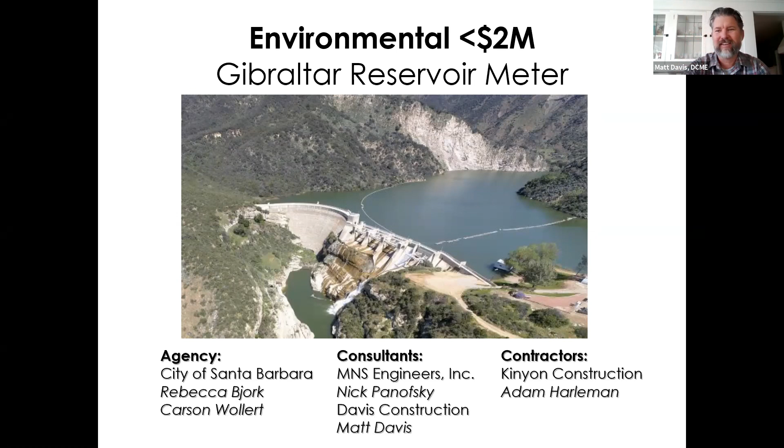And to present today, I believe Carson is going to present. Is he on? Or maybe Matt or Nick? I'm on. Nick's on the call. Okay, I had written down that Carson was gonna lead us through this, but yeah. Hi, Brianna. This is Matt, and I did speak with Carson earlier today, and he was planning on being on. So maybe he's just a little tardy, but I'm sure Nick and I could probably ad lib until he shows up. Okay.

So I guess if you wanted to, we have up here on the screen just some of the project highlights that we picked out. But if you want to share a little bit about the project, what the goal was, and maybe some of the challenges during construction. Sure, I can start off with just a couple of points on kind of the technical background of the project. So this project is how the City of Santa Barbara conveys water from Gibraltar Reservoir through their tunnel system to the city. And prior to this project being implemented, oh man, there's Carson. I don't want to steal his thunder. He just joined. Before I get into any details, I'll let him take over.

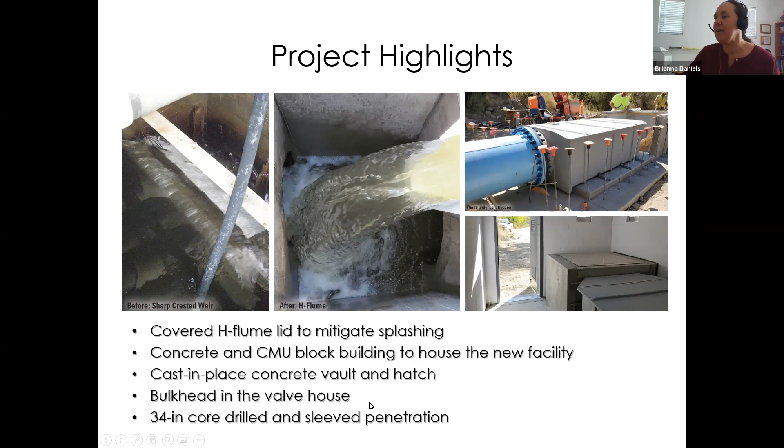Well, that's fantastic. That's really creative, and what a beautiful place to have a work site. Okay, so now we're going to test our skills, I think. Thank you very, very much. And the plaques should have been sent out. So, we have one more project before we get into our raffle.

Still in the environmental category, this is the Arroyo Grande Creek Channel Waterway Management Program. It's the County of San Luis Obispo with Nola Engelskirger and Cannon consultants, John Evans and Evan Lowe, and then Crye Construction did the construction. So we have quite a few slides in here. I believe John Evans is going to be presenting today, and you'll have to walk me through these slides.

So, okay, I'll tell you when to start. Can you hear me okay? Sure can. Okay, all right, let's go to the first one then.

Okay, so the county called the project the Arroyo Grande Creek Channel Waterway Management Program. And as you mentioned, the county was the primary agency responsible for the project. Okay, next slide. And as you also mentioned, both Cannon and also Waterways Consulting, who did all the initial hydrology analysis of Arroyo Grande Creek. And then they also came up with initial elevations of what the levees on both sides of AG Creek needed to be to be more storm worthy.

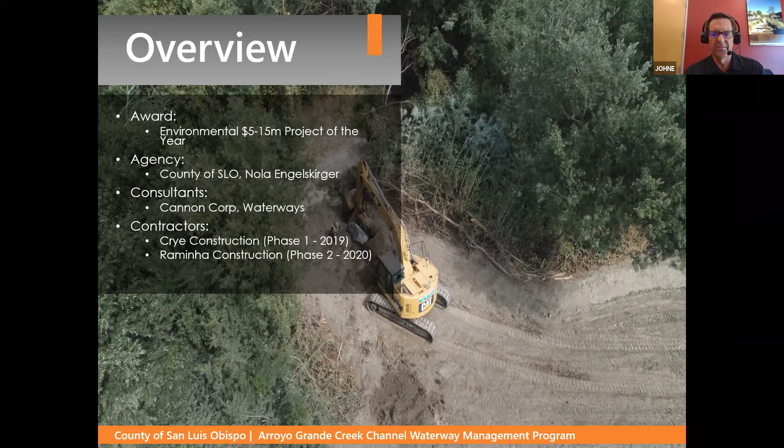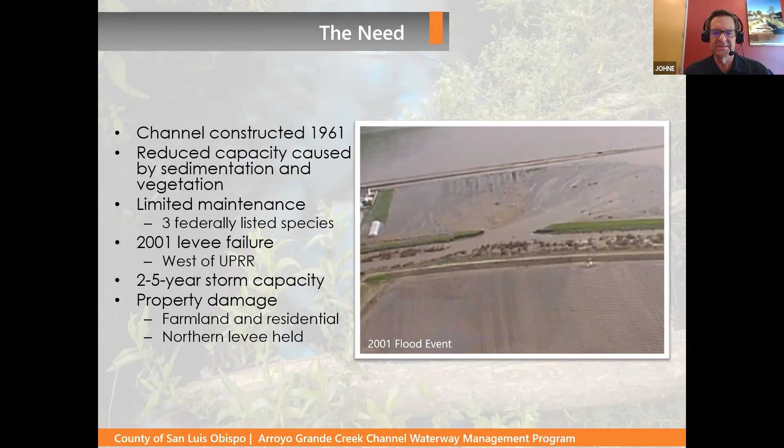So to solve the problem, several things needed to happen. First of all, there were funds that needed to be obtained, and through 3 grants and also from the funds raised through a flood control district that was established after the levee breach, $8.3 million was raised for the work. And the work basically consists of 3 things. One was to clear and clean up portions of the creek. The second was to fortify the levees. And the third is ongoing maintenance.

So when the permits were sought, the permits needed to include all three of those aspects, especially the ability to continue to get into the creek and maintain it after the work was done, so that the county didn't find themselves with the same problem that they had over the years, not being able to maintain it adequately.

There was quite a bit of community interaction and outreach that occurred with the project, especially with the farm field owners to the south. And then there was a lot of concern by the residents to the north, wanting to make sure that if water did ever breach the levee again, that it was going to head to the south rather than to the north. When the design was put together, it was a joint effort between Cannon and Waterways.

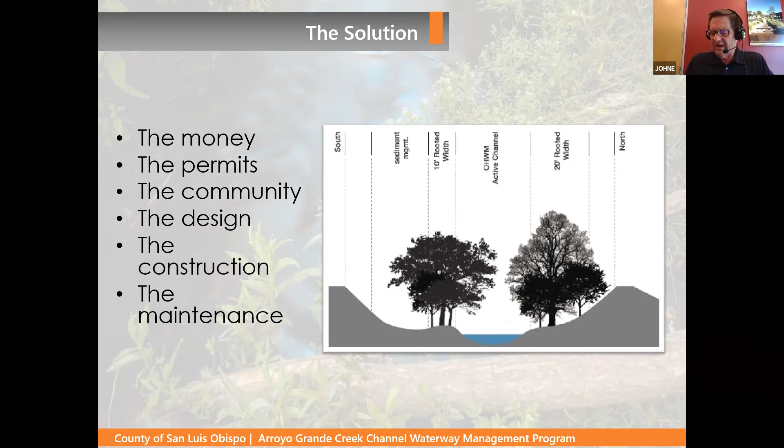But we were not allowed to do work within the primary channel, but directly adjacent to it, there was a berm that was constructed, and then a secondary flow channel about 1 foot to 1.5 feet higher than the adjacent primary channel, which is where secondary flows would end up. So when we got into the construction of the site, and you can go to the next slide here.

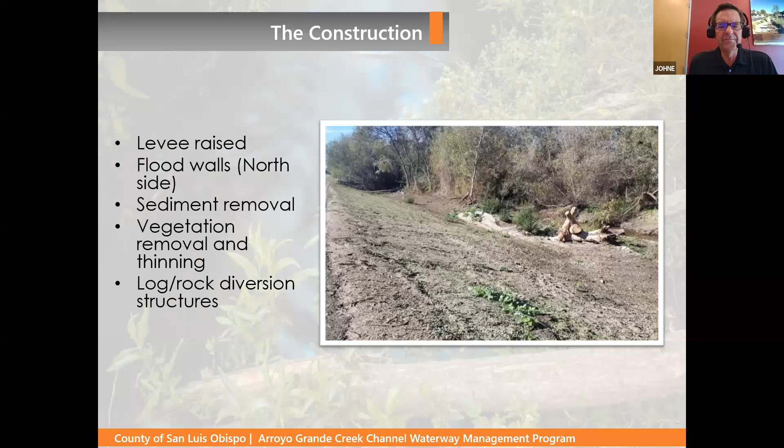One of the unique parts about the design was on the southern levee, which is designed so that it's 1 foot lower than the northern levee. So if flows ever did get so high that the levee was crested, then it would spill over the southern side, and it would flow over this turf reinforcement mat. And this is used especially by the Army Corps of Engineers on a lot of big river and waterway projects nationally. And the idea here is that it prevents scouring.

And one of the other things that it does pretty well is it prevents intrusion from rodents that get in there and destabilize the levees. And they love these levees as places to make their home. So this turf reinforcement mat is helping out with that also. When this is all said and done, on the south side of the levee, we're improving the capacity from about a 2 to 5-year storm up to a 10-year storm with 2 foot of freeboard.

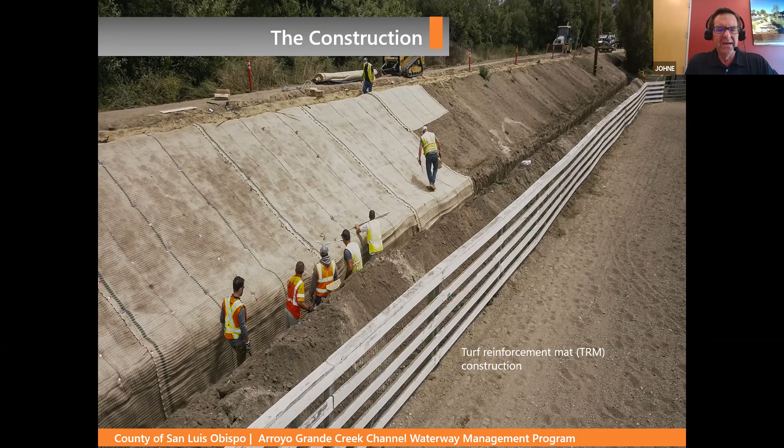And then if you took the freeboard away and you actually looked at when the southern levee would crest, it would crest at its lowest location with about a 16 or 17-year storm. The northern levee is designed to hold a 50 to 100-year storm. Next slide, please. So one of the things, as I mentioned also, that we did was make sure that the county has the ability to go in and maintain the channel.

So on a yearly basis, the county is going to continue to monitor how much vegetation has grown back in, estimate what the n values of the creek are, what the creek capacity is from a year-to-year basis, and then be able to go back in and do any kind of maintenance that's necessary to keep the channel as close to its current capacity as possible. And next slide. And that's it. Thank you very much.

Well, thank you, John, and thank you both for those great entries in the environmental category. Well, I don't have any sound effects here, but we can all clap. Those are both awesome projects.

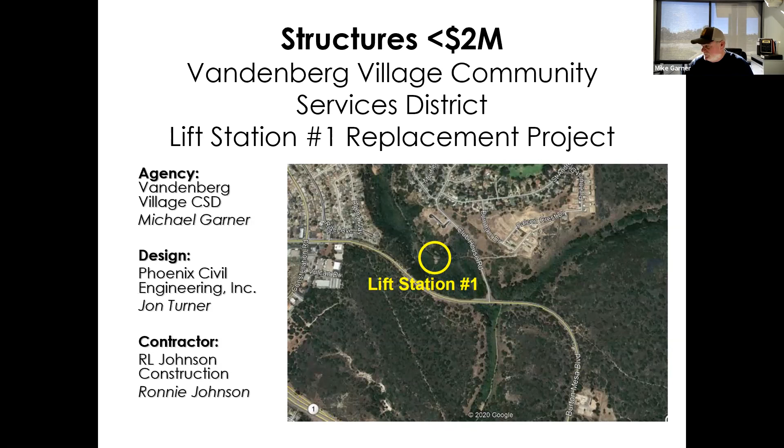So we went out, it was designed by Phoenix Civil Engineering. We sent it out to bid. We got no bids. So we were in a bit of a sticking point. So my board went ahead and basically made me project manager. I got a new title for this one. So what I did is went to our local contractors. R.L. Johnson has done stuff for us. And I went and hired different contractors in different phases of this. And it took us a couple of months.

Here you can see our wet well is where the sewer collects underneath. And then we wanted to go from 1,000 to 7,000, almost 8,000 gallons of additional sewer capacity. Also, we did have a generator on site, but unfortunately on that generator, when we had a power outage, we did have to have somebody respond within 30 minutes, or that

wet well would overflow. And on the picture to the right on the top, you can see the old station in the background and the construction of our new station in the foreground. Right behind that is Davis Creek. It flows year round, so we could not have sewer dumping into that creek. That would have caused a lot of problems. So in our construction, we left that old station there and we kept using it.

And then in our new stations, you see areas here, we went to a company called Arc, where we built a new manhole. We were able to build a new wet well, and they came prefab, which makes our job a lot easier. So through all this, we picked up our new lift station. It's a compact lift station through Smith & Loveless. You see that on your bottom left there. Inside there, there's 2 pumps. I'm sorry, I wish we had more pictures, but that's what we got for now.

So basically what these pumps do is they rotate. So during the day, that pit below that lift station you see on your left bottom would fill up. And usually on our old lift station, that would come on about every 20 to 30 minutes. A lot running on and off, on and off. There's 2 pumps in there and they rotate back and forth. So what we wanted to do is have more capacity, so we have them coming on for a longer period of time, but being shut off, so we don't have this constant hammering on a pump. So that's why we created the bigger wet well.

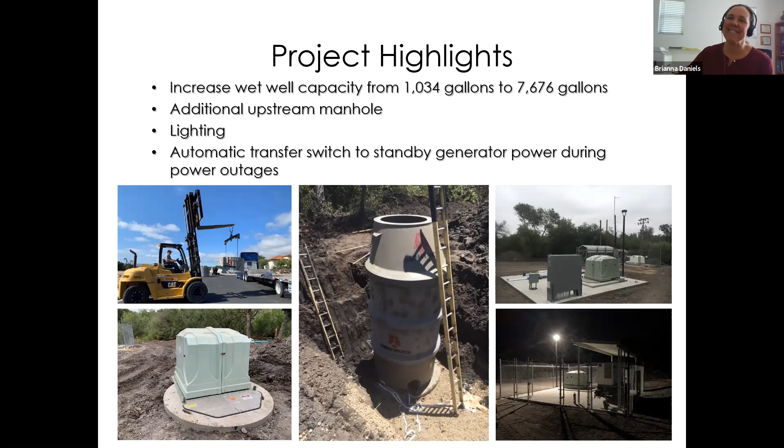Well, fantastic. That's a great project. And it's nice that it touched so many people. Oh yeah. Is that the plaque in the background there? Yes, can you see? I was told by Julie, make sure I have it where she could see it. All right, very good. Well, congratulations to the whole team. That's a fantastic project. All right, thank you. Okay, sorry about that, guys.

So next up, we have the City of Goleta, Jonny D. Wallis Park. With the City of Goleta, Joanne Plummer was instrumentally involved. On the CM and inspection side, we had Filippin Engineering with Kelly, who will be presenting today. And the contractor was CS Legacy, represented by Gregg Strumpf. So Kelly, you want to take it away?

Yeah, thanks, Brianna. We really appreciate the recognition. And I also just want to say thank you for putting on this program. I really like this every year, and I know you put a lot of work into making this happen, and it's fun to see everybody's projects and be involved every year. So thanks for all your work with it as well.

One thing I just want to say at the beginning is one thing I love about my job is when I drive around town, I constantly point out things to my family that I have a part in. And since I have two young kids, this project was especially fun because I think they usually humor me at being excited with bridges and flood control and stuff that we do, but I know they're way more excited about a park. So that was fun to be a part of that.

So just to give a short background on the project, FE wasn't involved in the design phase of the project. Joanne might speak to that a little bit, but I know that during that phase, there was a lot of public input from workshops and stakeholder meetings that really informed the design and incorporated the varied needs of Old Town residents. And they resulted in a host of amenities in this really small footprint. You can kind of see on the slide there, but if you've ever been to this spot, you understand how much is packed in.

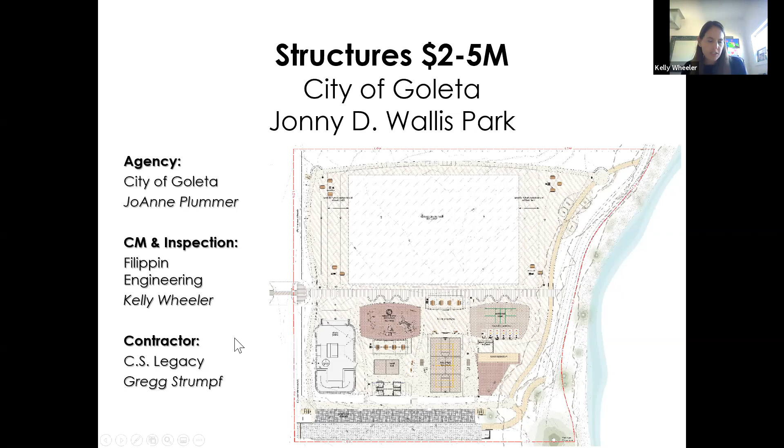For the construction phase of the project, the biggest challenge on this one was time. The construction contract started in May, and 200 working days landed us in early March. And the city had grant funding deadlines expiring at the end of March. So that really didn't allow for any delay beyond two weeks, weather or otherwise, which is a challenge on any project, especially a large grading project that spans winter.

And then the first hurdle encountered during construction was nesting birds, which delayed tree removal, which I know almost everybody here is probably familiar with, combined with a close second, which was utility relocations, and then followed up by discovery of additional unknown wells that had to be properly abandoned. So it was really a collective effort to rephase the grading to continue construction.

Contractor relations on this one were critical, which it is on every project, but especially on this because of those funding deadlines, we had to have a very good relationship with the contractor to navigate unexpected conditions that would come up and to expedite schedule on each one of those, along with keeping the costs as low as possible to the city. And then the slow start to the grading, because of those issues, was compounded by a wet winter. We actually, on this particular winter, had 19 working days lost due to wet weather conditions.

However, we made it by the skin of our teeth, largely as a result of combining a negotiation of a large grading claim with expediting schedule. So substantial completion was on March 29th, with a public ribbon cutting ceremony that was huge on March 30th. So nothing like cutting it close, giving yourself a day.

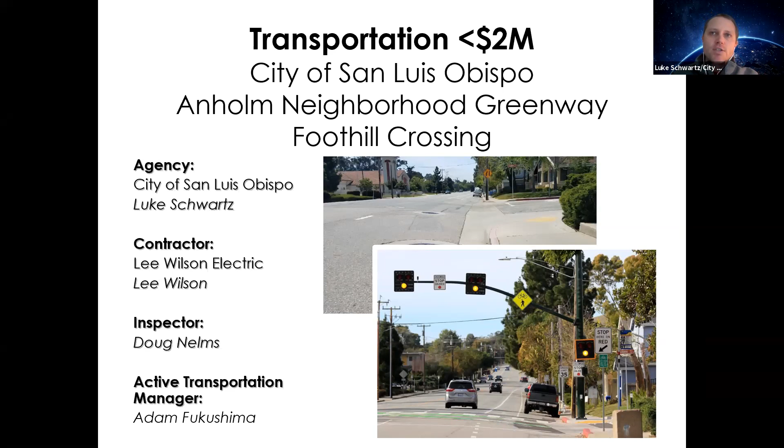So we started the planning phase as part of an overall safe routes to school plan for those two elementary schools, which identified a variety of physical improvements needed to make walking and biking to school more accessible and safer. And the highest priority project was unanimously improving the crossing at this location.

So we looked at a variety of options and ultimately decided a controlled crossing, like a traffic signal, or something with that level of comfort was what we needed for the street type. But the existing conditions did not quite warrant a full traffic signal. So we looked at a pedestrian hybrid beacon as a potential design solution.

To my knowledge, this was really the first location in the county that utilized a pedestrian hybrid beacon, often called a HAWK signal. And so we were excited to move forward and be innovators in trying something new. We thought it was a good solution for this location. So, moving from sketch level drawings as part of that plan into actually designing and implementing this project was really exciting. And so, as you mentioned, Lee Wilson Electric was our contractor on this.

They had some sub-consultants that helped with some of the concrete work. We included ADA curb ramp upgrades and reconstructed a cross gutter to level out a crossing of the side street here, which is Ferrini Road. The elementary school is maybe 200 or 300 yards just north of this intersection here. So this was completed last December.